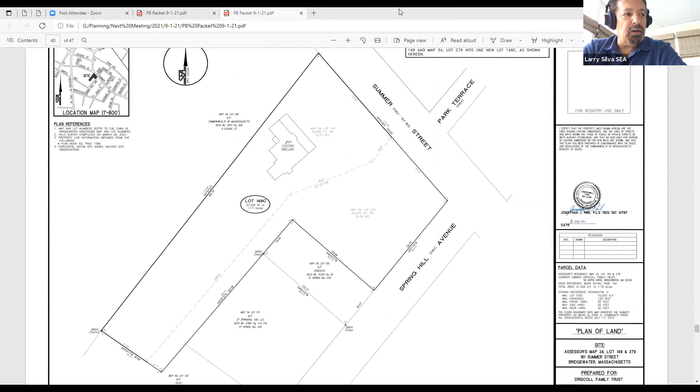As you can see on the screen, that's the information regarding compliance with that comment. As far as the second item, the landscape plan, a plan with sufficient detail for plantings and so forth has been provided, and that's also on the screen right now. I believe those were the two items that required continuation to tonight's meeting, and I would answer whatever questions you might have.

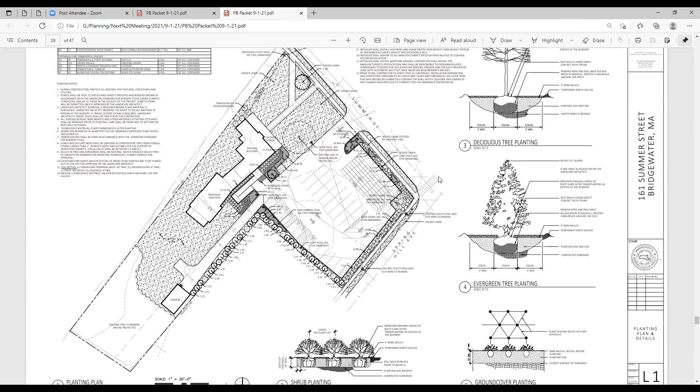I believe the comment from the department was that this does now meet everything we had previously asked for, is that correct? I believe that's correct. You do have the director of DPW on the line if you had any questions for him as well.

Okay, I guess we'll open it up to board questions then. The only question, just to repeat what the chair said—I wanted to clarify that the Economic Development Committee and Mr. Antonaro have agreed that this meets the requirements we had from the last meeting. That's all, it seems fine to me. From the department's perspective and the planning perspective, it meets everything the board had asked for. I can't speak for DPW and engineering.

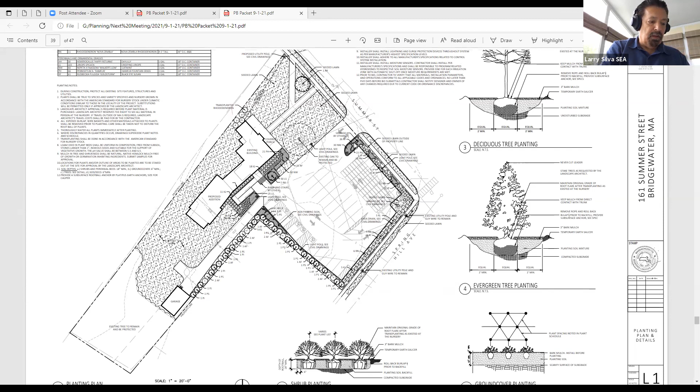There's one in the front yard, and there's lease lighting, or existing utility pole, the guy wire to remain. They were going to be on those that would be directed in towards the parking lot. There is nothing that would be creating stray light to the neighboring properties.

But you do see the lights specified on the landscape plan. Yeah, I do see it now. I just want to see if they're not going to cast any lighting or any shadows.

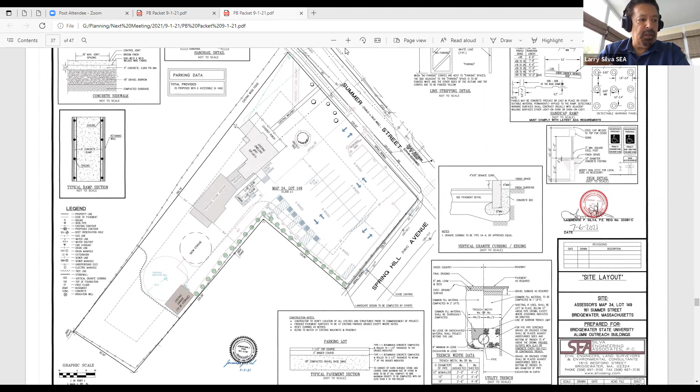Yeah, the light standard is also per what is normally used in the area of the university. And that was shown on our drawings, on the civil drawings. On the details page, there was a light pole detail. Okay, I have no more questions.

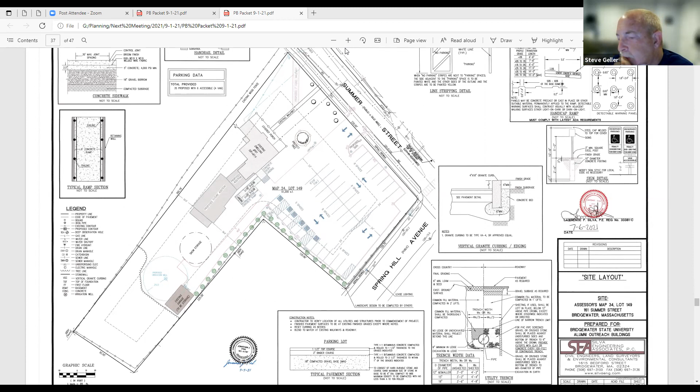Any other board questions? Okay, do we have a motion?

I'll make a motion to approve the plans that have been submitted with that added condition, should they decide to add a dumpster, that it be fully enclosed. And all our other standard conditions of approval.

I'll second the motion. Do we have any discussion? All righty, we'll take a roll call vote.

Mr. Ajemian, yes. Mrs. Garino, yes. Mr. Geller, yes. And I'm a yes.

Okay, I just have to text Pat to let him know we're all set. Gotcha, sorry, I was behind the 8 ball. That's okay, we can take the other two in the meantime. Should be pretty easy.

Let me just pull up my agenda here. Okay, do you need the agenda put up on the screen? I have it up, thank you. Okay, so I believe one of these was a continuation request and one of these was a withdrawal.

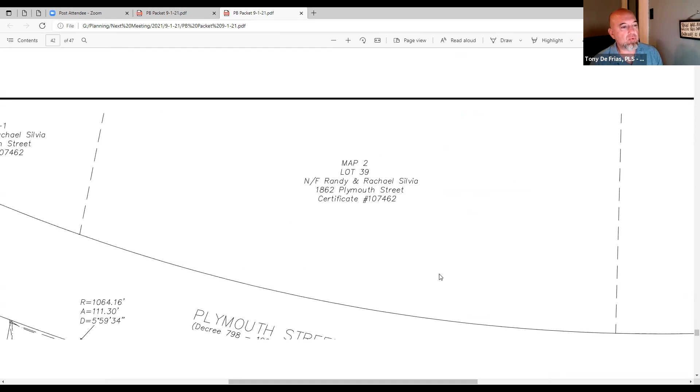On Assessors Map 27, known as lots 1 and 11. This is located in an Industrial A zone. We're proposing to take those two parcels, eliminate and combine them into a single lot which conforms to the Industrial A requirements with frontage of 200 feet and area greater than 40,000 square feet. We also have 22,879 square feet of upland, because part of this lot is comprised of a bordering vegetated wetland. The second piece is parcel A, which is not a buildable lot at this time because it does not have sufficient frontage. That parcel will probably be conveyed to an abutter, who happens to be the applicant.

This property was in the family. The mother had recently passed away, so the family has decided to put this dwelling on its own lot and put it on the market. We do have the proper frontage of 200 feet, and access through the frontage. We are fronting on a public way, which is Plymouth Street, and we have access to the dwelling, which is currently vacant. A few months ago, it did have a new septic system installed. So we're asking that the board endorse the ANR as shown, as presented.

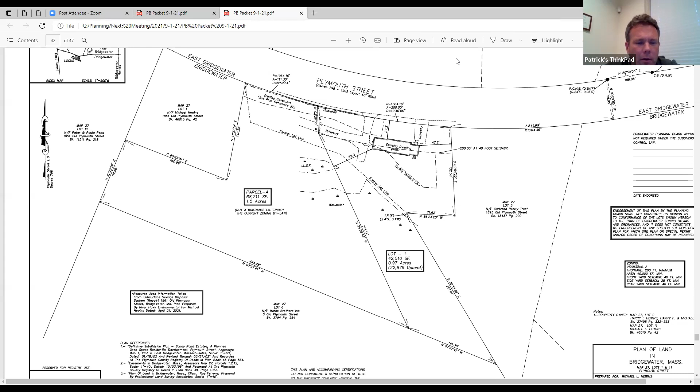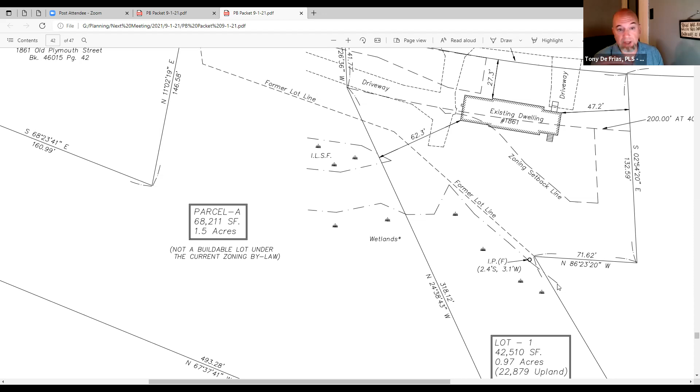Okay Tony, the non-buildable lot, the wetland that looks like it's in the middle, is that an isolated wetland? Yes, there's partially an ILSF on that property, but the wetland line does continue from east to west direction towards the abutter. So most of that wetland line doesn't stop there, it continues through? Yes. That lot is not buildable on its own because it does not have sufficient frontage. That lot only contains 111.30 feet of frontage, so they're shy about 88.7 feet. So there isn't anything he could do at this time. If there was something to be done, I'm only going to speculate that it would probably be at some point combined with other land of the applicant's.

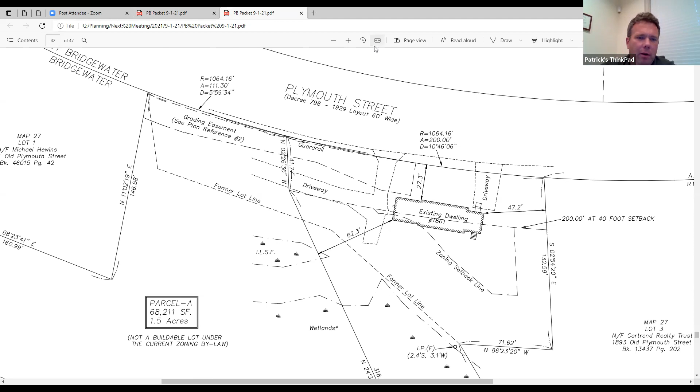Any board questions for Mr. DeFrias? Okay, do we have the staff recommended approval, correct Ms. Breck? Yes. And do we have a motion to approve, endorse, I should say, for the board? I'll make a motion to endorse, by Mrs. Guarino. Do we have a second? I'll second, by Mr. McDonald. Any discussion? All in favor of the endorsement? Roll call vote, Pat. I'm sorry, so I'll take the roll call. Mr. McDonald, yes. Mrs. Guarino, yes. Mr. Geller, yes. Mr. Ajemian, yes. And I'm a yes. Okay.

Thank you, Tony. Thank you, have a good evening.

Next on the agenda, are you still sharing the screen? Did I lose that? Oh, I apologize. Could you just blow that up, please? Oh yeah, this is 152 Elm Street.

So this is essentially just reading through it. This is a modification request. Mrs. Farinacci? Correct. Is Mr. Gallagher or Mr. Graziano with us? Mr. Gallagher here. Mr. Gallagher, the floor is yours. Go ahead. Okay, evening. It's Frank Gallagher, Gallagher Engineering in Foxborough.

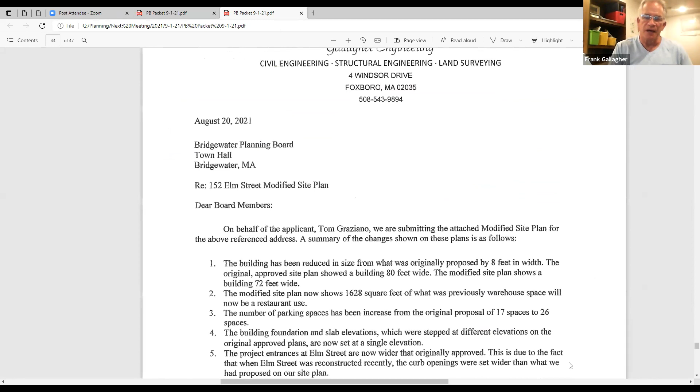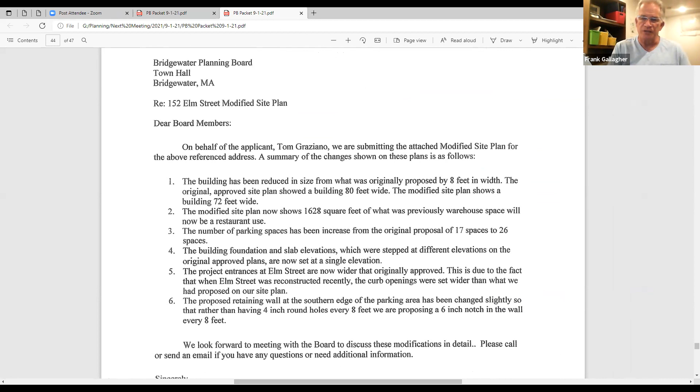We've submitted an application, plans, and a couple of letters to you regarding some changes that have been made to the original approved site plan at 152 Elm Street. I submitted a letter on August 20th that summarized what those changes are. Just to fall back a minute, this was a site plan that was approved back toward the end of 2019 for a warehouse building on that property. So it's currently under construction, and there are some changes that we'd like to get the board's approval on. We'd like to do this as a minor modification to the plan that was originally approved. So from my letter on the 20th of August, I list 6 points.

The first thing to note is that the building has actually been reduced in size. It's 8 feet more narrow than it was originally approved to be. The building originally was 80 feet wide by 175 feet long, with a small bump out in the front. But the building that was actually constructed, or is under construction there, is 72 feet wide. So it's actually been reduced. The pavement around that building has not been reduced; we're holding the original edge of pavements as were approved on the original site plan.

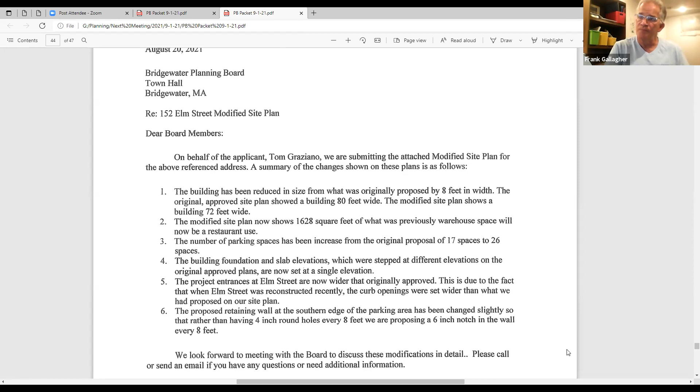And then a minor item, if you look in the lower right-hand corner of the plan, you'll see we've provided a detail for the retaining wall that is on the... Gallagher, can I interrupt you for a minute? Sure. Ms. Farinacci, could you show that plan please? I'm sorry to interrupt. That's okay.

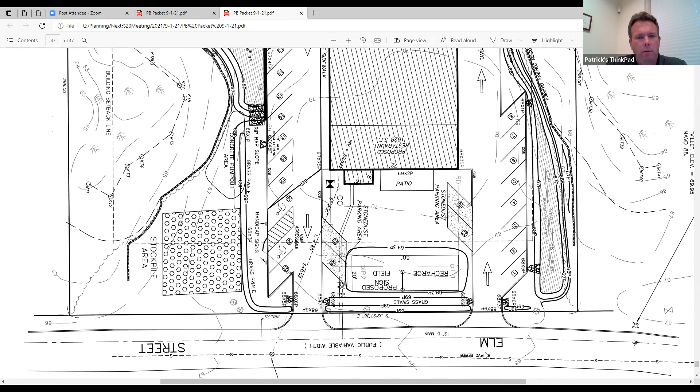As we're looking at the plan, maybe the easiest way to orient it is on the left side of the building, you can see that there's a detention basin there. And there's a retaining wall at the edge of the parking lot on, let's see, I guess it would be sort of the north side of the retaining wall. It was always proposed to be a retaining wall, and it was proposed to have holes cored through the wall, I think 4-inch diameter holes every 8 feet, in order to let stormwater flow off the parking lot and into the basin.

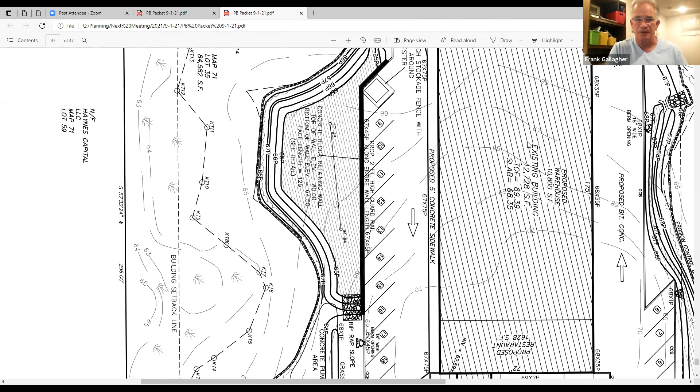Mr. Graziano actually makes retaining wall blocks as part of another business that he has, and he can basically make his own blocks. Rather than core a hole through a 2-foot wide block, what we're proposing is that we just create a notch in the top of the block that's 6 inches wide. So it's essentially the same thing. It's just that he has the ability to precast these blocks in his own shop, and it's much simpler for him to do it that way than to core a hole through a 2-foot wide piece of concrete. So we did show a detail of that, and if you maybe scroll to the lower portion of the plan... oh, okay, no, it's not on that.

It's actually not on that plan. So, in any case, I guess that's what we're asking the board to change in that regard.

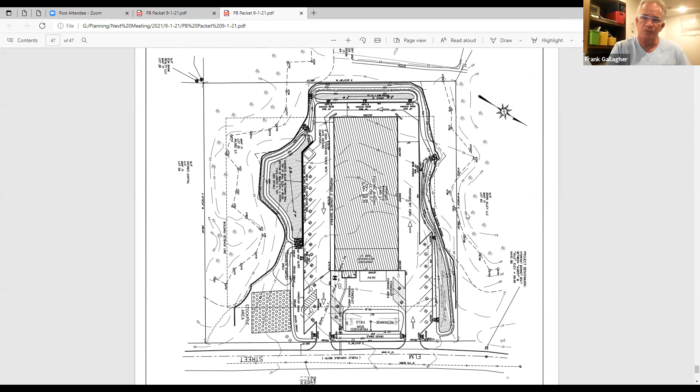I submitted a second letter following up the filing, and it summarized the drainage impacts that this change would have. If you look at the building, it's all fed into a recharge area. The stormwater from the roof of the building is fed into a recharge area right up at the front near Elm Street.

Now we're reducing the size of the building, so that really means less stormwater would be going into that recharge area. We're not proposing to reduce the recharge area, so if it worked for the larger building, it's certainly going to work for the reduced building. So that's one point to make.

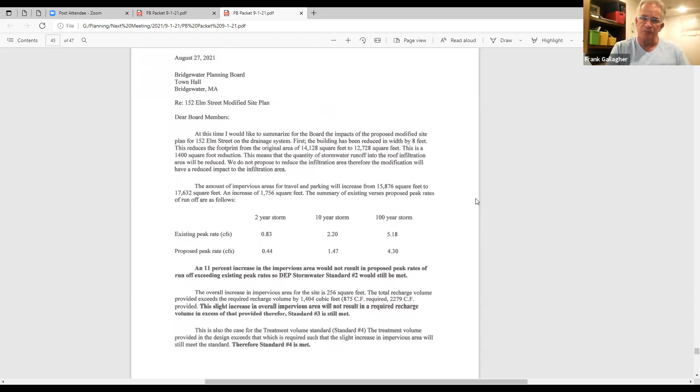And if you look at the second paragraph, it summarizes standard number 2 of the stormwater standards, which requires that you meet the existing peak rates of runoff. From the original report, you can see that at least in the case of the 2-year storm, the proposed peak rate is about half of what the existing one is. The 10-year storm, it's slightly more than half, and then the 100-year storm, which technically you don't actually have to meet the existing peak rate, but we usually try to meet that in any case.

But you can see that's close to 1 cubic foot per second less in the proposed conditions. So the small amount of impervious area that we're adding to the site isn't going to impact those peak rates, certainly not to a point where it drives them over the existing ones. So that's stormwater standard number 2 — with confidence, we can say that we still meet that standard with this modification.

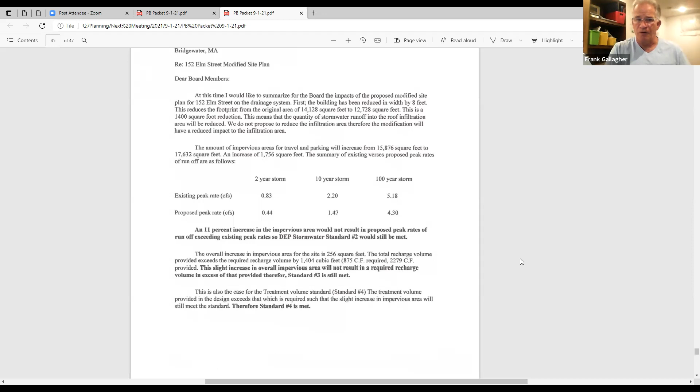If you delve into that same report, we have a recharge volume. That's standard number 3, and the recharge amount is far in excess of what the standard calls for. So again, this small change in impervious area is still going to be met by the existing infrastructure that we've got on this site. And then standard number 4 is treatment volume.

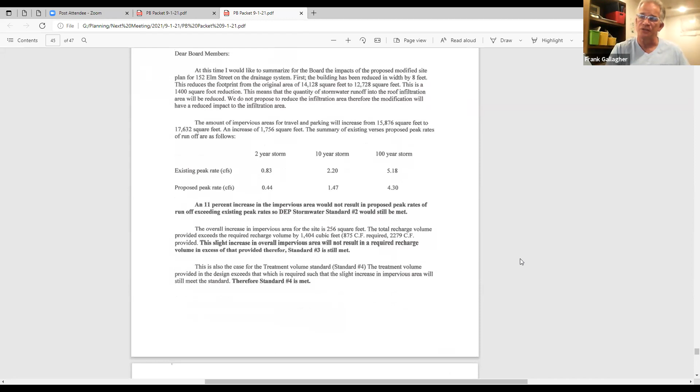And again, the original design provides in excess of what the standard calls for, and this change that we're proposing would not drive us up to a point where we don't meet that standard. So essentially, all the stormwater standards are still met by this revised design. So given all of that, we're asking the board to just approve this as a minor modification to what they originally approved back in December of 2019.

So, Mr. Gallagher, can I ask a quick question? Sure. Some of this stuff we already approved as a minor modification, correct? Mr. Graziano was before us a couple of weeks ago for the restaurant, for some parking modifications, and that was already approved. The only condition we had imposed on him was that if the patio shown here were added, that would trigger another stormwater review, so we let it go as a minor modification. If the patio became part of the equation at a later date, or any additional expansion, then you'd come back for a major review.

Isn't some of this already done, Mr. DeBobrian and Mrs. Farinacci, or am I losing my mind? No, that's accurate. Yeah, the use requires a special permit in the zoning district, so that was received, I believe. So it was a minor modification to the plan — there were some modifications made, but this number of parking spaces was not changed in the previous modification. This increase in parking spaces is new, and the patio is new.

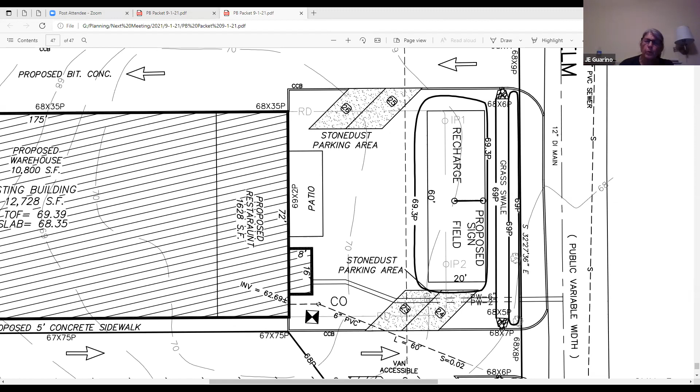Give me one second. Yeah, the patio had been taken off, and we approved the restaurant with three tables. That's correct. Is Mr. Antonero still with us? Mr. Antonero cannot speak to this project. Oh, that's what I was going to ask. I didn't know if you could.

Mr. Chair, the thing I am noticing, because I have the old plan that came before us on July 7th, is first it's showing the bump out on the building to be closer to the walkway, to the drive aisle, than what it's shown proposed. Excuse me, Mrs. Farinacci, can you go back to the plan, please? Are you pulling something? All right, I got it.

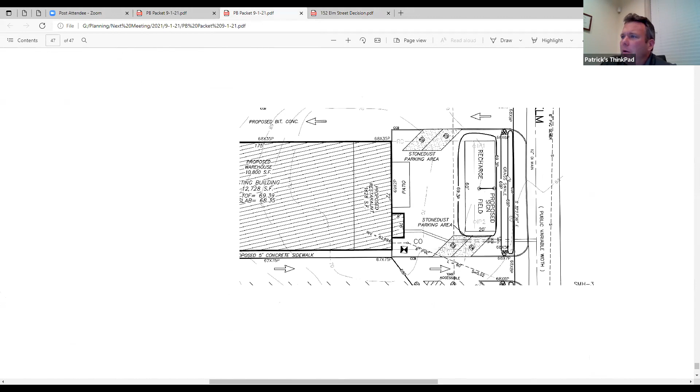Okay, go ahead, Mr. Geller. I'm sorry. So the old plan that came before us on 7/7 doesn't have the patio. Did they come after that? No. So it doesn't show the patio on the 7/7 plan, and it doesn't show the stone dust parking areas in the front.

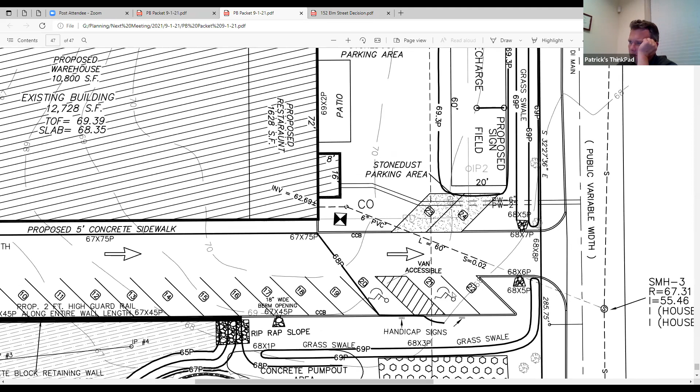And for a conversation piece, Plan North, the parking spaces along the north side of the plan is 8. The original one we saw has 7. Then down on the bottom, it shows 22, and we had 15. They're showing 9 to 22, and the other one shows 8 to 15, but does not include the 2 handicap spots on the end. The original plan also shows trees in front of the building, approximately where the patio is.

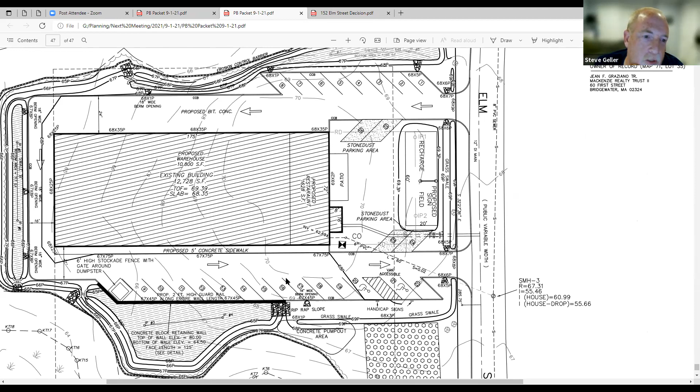I could have sworn though, at the last meeting, the patio—maybe it was just the one shown before us in our packet—but I think it was. I believe you are correct, Pat, because I do remember talking about a patio. So Mr. Gallagher, is this plan adding the patio as well or no? This plan is proposing a patio. I understood the applicant wanted that, so that's why I showed it on my plan.

I could make, I guess, a couple suggestions. One is to give you a revised plan that removes it. Or two, if the stormwater is a concern, we could specify that the patio be some pervious material that wouldn't create additional runoff.

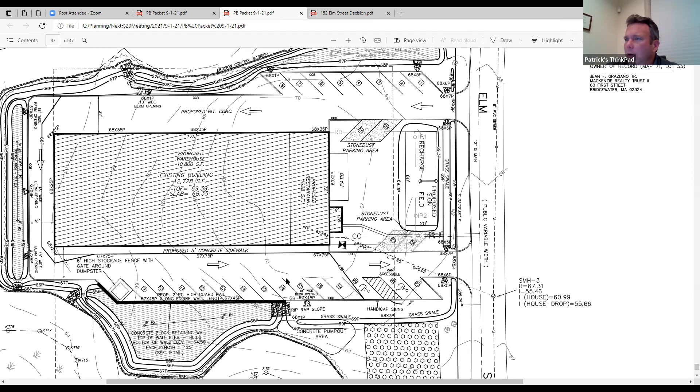All right, so the board has to determine if it's major or minor. I think the staff made a recommendation, correct? Yes, I believe we recommended that, due to the amount of additional impervious surface and additional parking, it be considered major, so that we could have an outside firm look at the stormwater and the traffic circulation.

My only concern is that Mr. Antonero can't weigh in on this—that's why I was seeing if I could just ask him a general question, but that's all right. Is it, because last time Mr. Graziano turned this in, it was a month before we actually determined we couldn't get a response for this—is this something we could turn around between now and the 15th, do you think?

I don't know, we can certainly reach out to the outside consultant tomorrow. I don't know what their schedule is or their availability to get something back in two weeks. I can't answer that question without talking to somebody.

Would this delay—I mean, we've already approved the special permit for the restaurant to open—would this delay or not delay the opening if we don't get it? I can answer that. Mr. Gallagher, how far away from opening are they? I don't know, I would say they're probably a month away. They're certainly not going to be opened, I don't think, within the next two weeks.

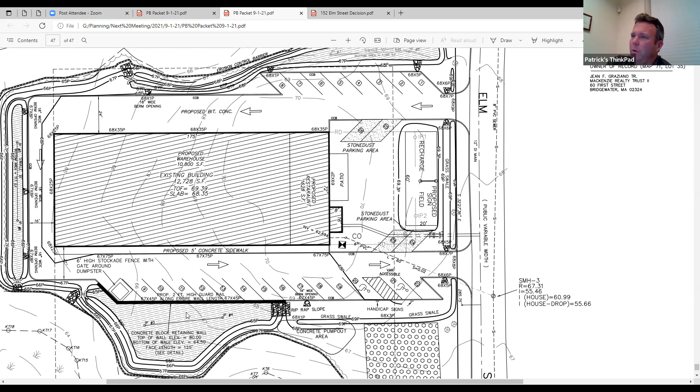There's more impervious area. We were going to send it for a major modification just for the patio. Now that we're adding the parking spaces, et cetera, and we don't have the benefit of in-house engineering at this point to confirm whether or not this works. So I think we need to have somebody look at this. Mr. Gallagher, when you said it meets number 2 of the stormwater, does that mean our stormwater regulation, which is 90% pre and post runoff and rate and volume? Does it still meet that? It still meets that as well, yes.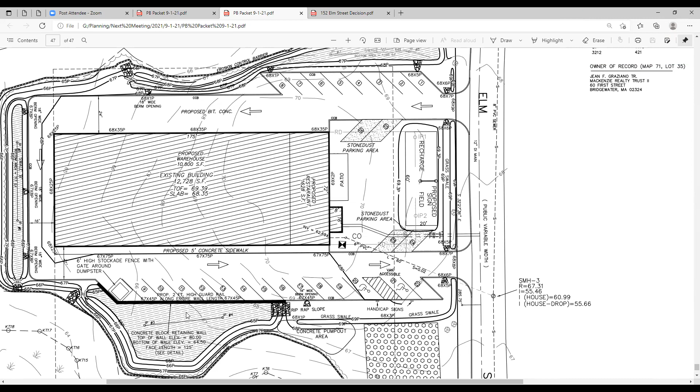I would agree with Pat on that. If this is what they want to go forward with, I believe this would be a major modification.

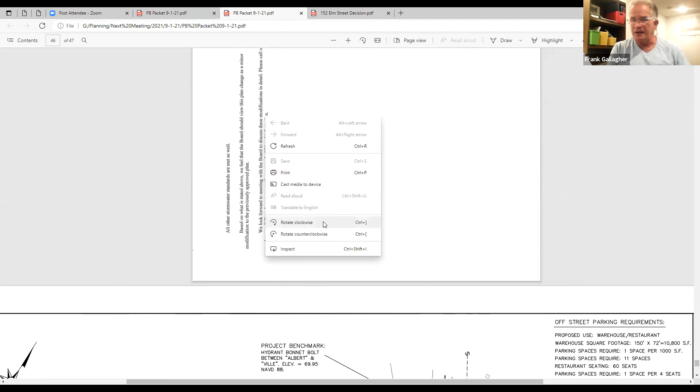Just one point, if I could. If you look at the letter I submitted, really what it amounts to is, if we take the patio out of the equation, we're adding 256 square feet of impervious area overall. The building's reduced, the parking area, the paved area is increased just to meet the building. So really that's a wash, but with the additional parking spaces we add, it amounts to 256 square feet of added pavement. So it's pretty minimal.

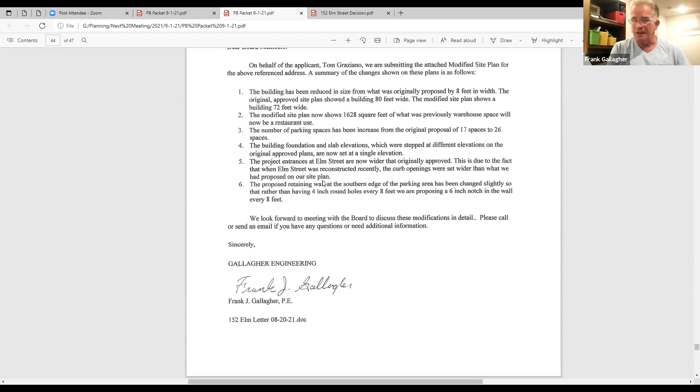I have a question. Any engineer would probably go along with that, but again, I know the staff's made a recommendation. I just want to make sure we've quantified it properly—it's pretty minimal.

How about? Somebody, I can't—I just see Mr. Gallagher, somebody else trying to speak. I'm sorry. Yeah, I have a question.

Originally what was proposed was just like what Gene said, a 3-table restaurant and the warehouse, so there wasn't much parking needed. And even then they had planned on providing more parking than what was originally required. Now we have this fairly large expansion of parking. So I'm wondering what the plan is for that, what it's going to be used for. Is that for the warehouse, or is the restaurant area being expanded?

Okay, aside of the—well, outside tables, yeah.

So let me just make sure I understood it—the people who came requesting the restaurant use, that required a special permit to be approved to convert that space from warehouse to restaurant. So that was the process they engaged in. I guess they showed some changes to the site plan as part of that, but from what I understood, the exercise was to obtain a special permit to just allow them to even have a restaurant as part of this building. So they did file that, they did get approval to have the restaurant use. And then, the way I understood it, we would now follow up with the modified site plan, given the fact that we now have a different use for part of the building.